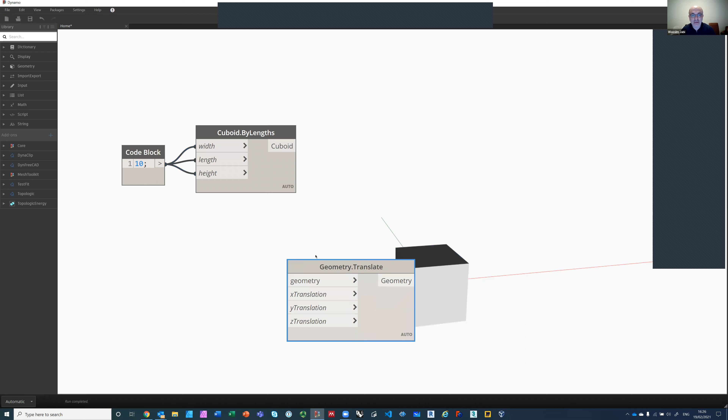What I want to do is a 3 by 3 composition, so I'm going to make 3 cubes and 3 cubes in a grid. That's how we do it in Dynamo. I'm going to translate these - if you know a better way to do it, please don't shout at me, I just do sometimes a very naive way of doing things. But it really doesn't matter. So I'm going from 0 to 30 in the Y, and I'm going to make a cross-lacing so they look like a grid.

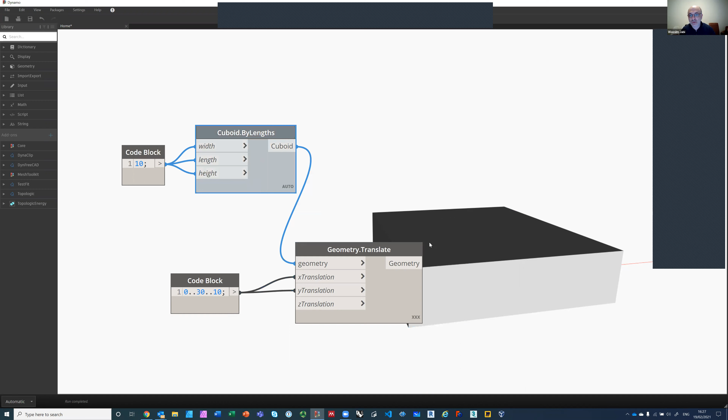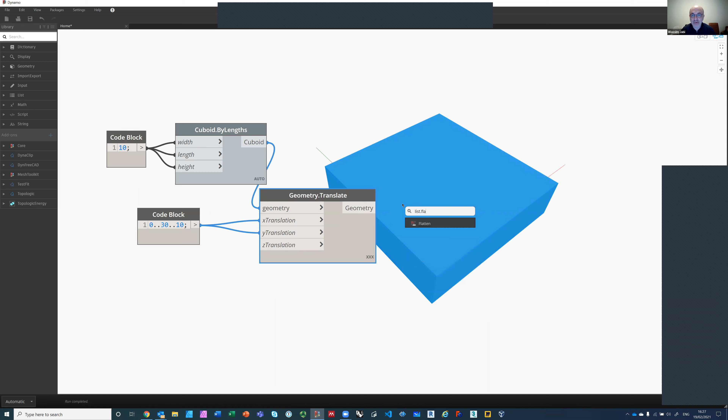Now it might look like a solid, but in fact this is made out of several cubes, a 3 by 3 grid. As I said, it's not important how we got there, but this is basically what we're doing. I just need to get the windows out of here, just to get a good view of it. And I'm going to flatten this list - just make a list, and I'll show you what this list looks like. So it should have 9. Oh, why does it have 16?

Sorry, I'm going from 0 to 30, I should go from 0 to 20. It should have 9 cubes, 9 cuboids - that's what it is. So now that I have these 9 cuboids, I can change them into topologic cells.

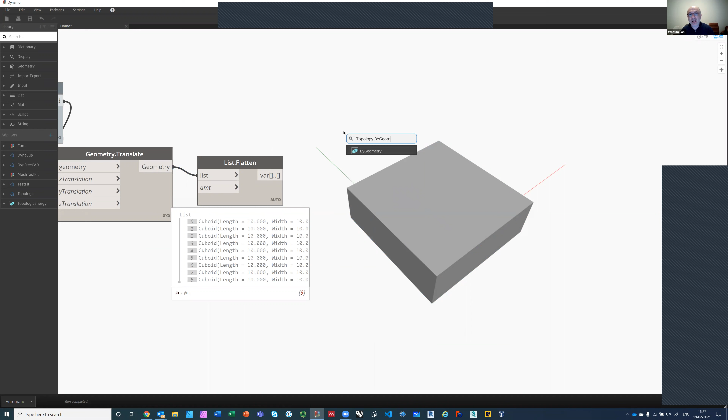So I can say topology by geometry. Now these are things that I have written, or rather the team has written, so this is all under topologic here. All of these things going from a vertex, an edge, a face, a cell complex, etc. But topologic has only one entry point and one exit point: topology by geometry, meaning create a topology from a geometry, and topology dot geometry without the word 'by', which means take a topology and translate it back into geometry so I can see it on the screen.

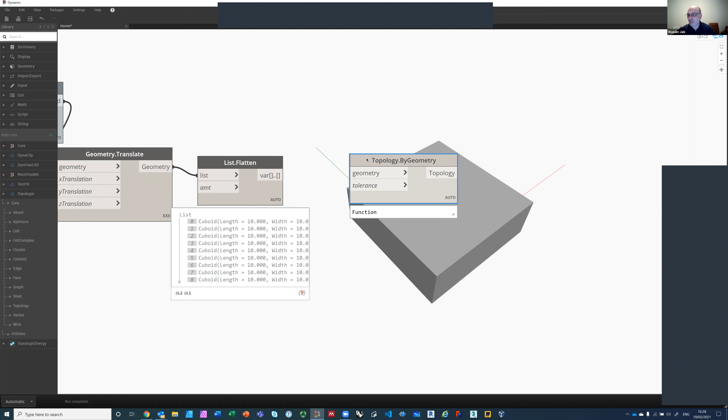By design, this is a user interface decision - we decided that topologic should not draw anything to the screen until you ask it to, just to save you time. Because you are thinking systematically about topological relationships, most of the work you're doing is about that, not about the form, as Miguel has said. So we decided not to draw anything to the screen automatically. If you want to see the geometry, you can do that, but mostly you are looking at the relationships.

So once I have connected this geometry to topologic, I get 9 cells - a cell is like a container of space. Once I do that, I usually go ahead and hide the original cubes, because right now I am in my topologic world here.

So let's start simple. Let's say I want to build a connection - right now these are 9 independent cells, they don't know about each other. In order for them to know about each other, you need to build a higher structure called a cell complex. The word just means a group of cells that are interconnected. So I'm going to do a cell complex by cells - the word 'by' is always an agreement on how we do it. So, cell complex by cells.

So now I have a cell complex. You don't see it yet. This cell complex is a 3 by 3 grid. But let's assume I'm a structures guy, and I want to order the beams and columns that make that cage. So let's go ahead and get the edges of this. So, topology.edges.

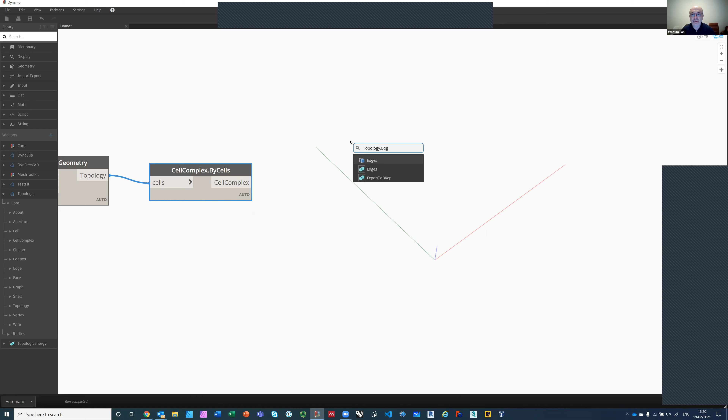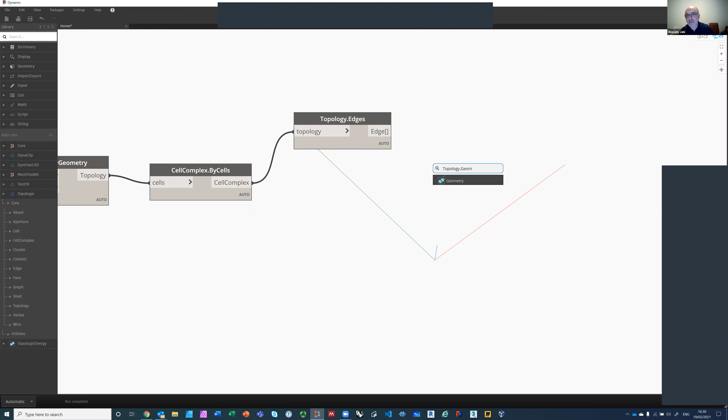Okay, let's go ahead and visualize them. So, topology.geometry. And these are the edges.

Now what is so special about that? You look at that and say, well, I could have just drawn it in wireframe before. So what is so special?

What is special about this is that there are no overlapping edges. So if you want to build this out of a wire of some sort, get rebar, get cables, do anything, and order these pieces that are 10 units long, you can count them. We can sit down and count them. Topologic will give you those unique items, never overlapping. So there are no overlapping faces, no overlapping edges, and no overlapping vertices. Everything is unique, and everything is interconnected.

So I can ask this vertex here to give me its edges, and it will give me those 3 edges. I can ask this edge to tell me which 2 faces it's part of, and it will give me this horizontal face and this vertical face. So everything is interconnected. If we count them, do you want to go through that exercise? I don't know if you want to go through the exercise of counting the unique stuff, but you'll end up with exactly 64 edges.

Could I ask something about this? Yes, please. What if somehow I made it in a different way and one of my cells is like 0.00001 centimeter off? What would happen then?

If it is off within a tolerance, everything works because we're using floating points. It has a 0.0001 tolerance. But if it is off, and we get that a lot from dirty BIM models as we call them, it will not build it if it cannot build it. Within that, if it violates the tolerance, it will not build it, definitely. It will say, I cannot build a cell.

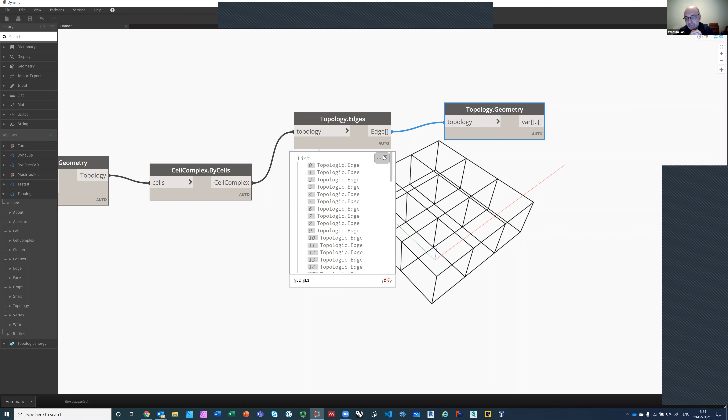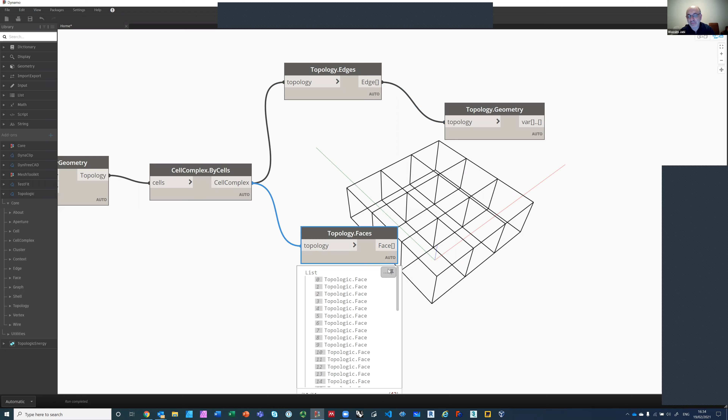So you see them here on the left side. Okay, so we got the edges, perfect. So let's go ahead and get the faces. So topology.faces, and again you can count them, and we can find out how many faces. But we have 42 little squares.

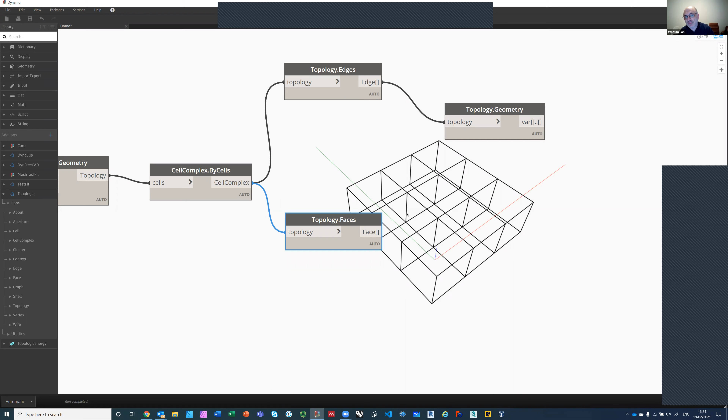Now let's find out, let's do a simple operation. We need to find out the interior faces of this cell complex, right? So the interior faces are these interior walls, and we want to separate them from the exterior walls. So what is the rule for finding out? What distinguishes an interior wall from an exterior wall in this type of construction? What can I use to test it?

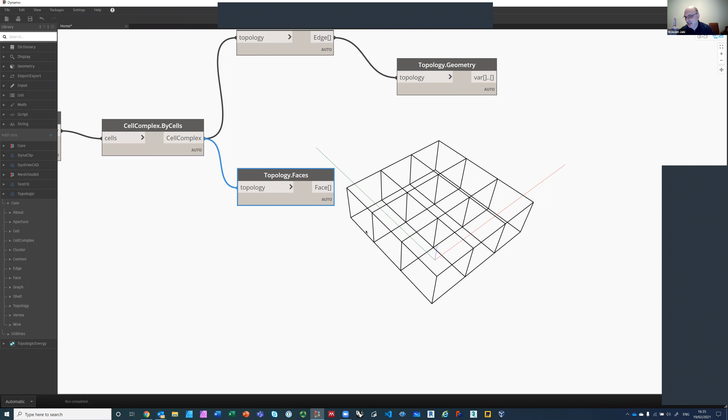They're connected to 2 cells. Exactly. So the interiors are always connected to 2 cells. The exteriors are always connected to 1 cell. So I can test for that. I can say topology.cells. And now we are climbing up the tree rather than climbing down the tree. I'm not taking a cell complex and saying give me the cells, or taking a cell and saying give me the faces. I'm taking a face and saying give me the cells that you are connected to.

So it's a more advanced operation. I get this nested list. You'll notice that because I have a list of 42 faces, I will have a list of 42 of these things, from 0 to 41. But some of them have only 1 element, 1 cell, and some have 2 elements. For example, face index number 1 has 2 elements, 2 cells. So obviously that's an interior one, and I need to extract it.

So I can do a count, I can count these things. So I can do something like list.count, and I'm going to count this list. Now if I count the list, it will tell me you have 42 things. But I don't want to count the top list, I want to count what's inside the list. So Dynamo allows me to do that. If you click here, you say use levels, and I want to count at level 2, like the list within the list.

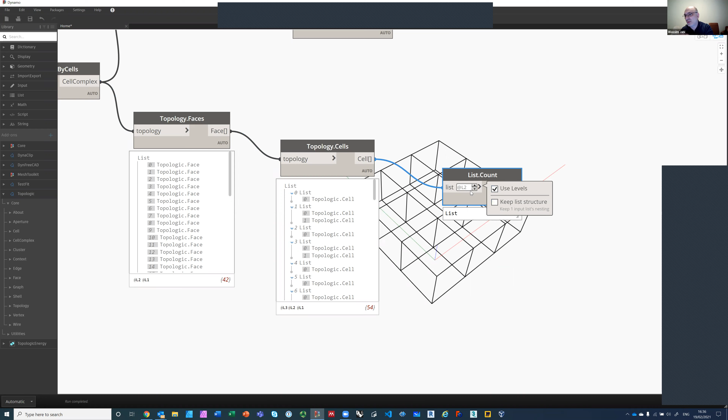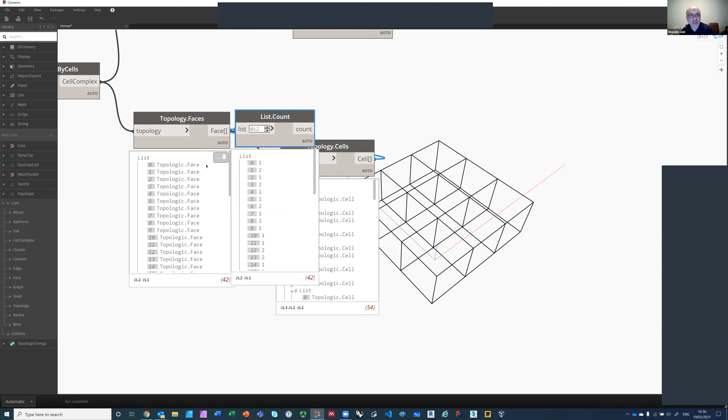So now I get a list of 1s and 2s, and I can put it next to this one like this, and match it. This one is an exterior, oops sorry, this one is an interior, exterior, interior, etc., as a concept, because this one has 1 cell, this has 2 cells. So now I can turn this into true and false, I can do an equality test.

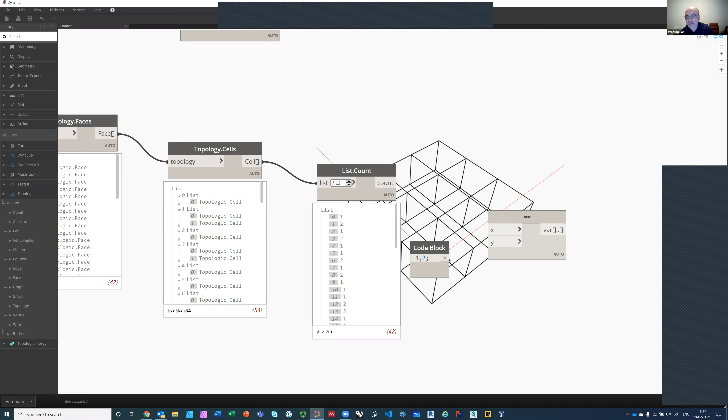So I can say, okay, let's find out if this is equal to the number 2. So tell me which ones are equal to 2. So now I have 42 false or true values. So I can use this to filter this list of faces. If it is false, don't include it. If it is true, do include it.

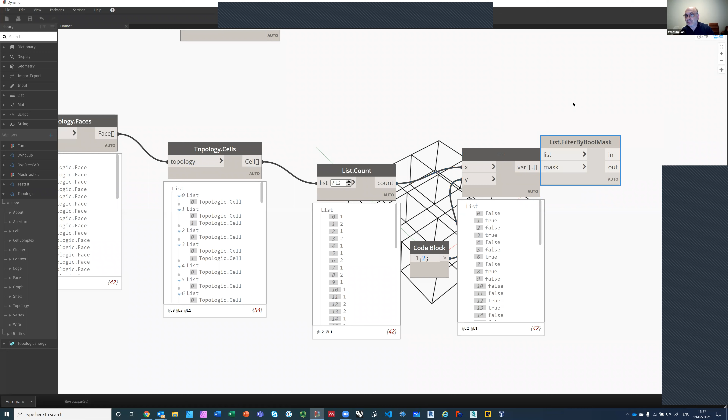So I can do something like filter by Boolean mask. And this is not Topologic, this is all Dynamo now. But as I said, what's important is not that I'm able to filter, what's important is that the face was able to answer the question for me: are you bordering 1 cell or 2 cells? That's what's really essential about this.

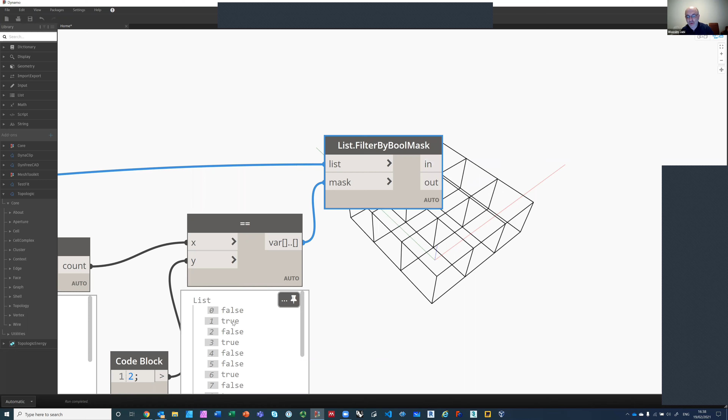So I'll feed it the list of faces, and I get an in-list and an out-list. The ones that satisfy this condition of true, and the ones in the out do not. So I can take the ones that are in and visualize them. So I can say topology.geometry, and visualize those. So those are the inner ones.

Any questions on that? Did I lose people or are we okay still?

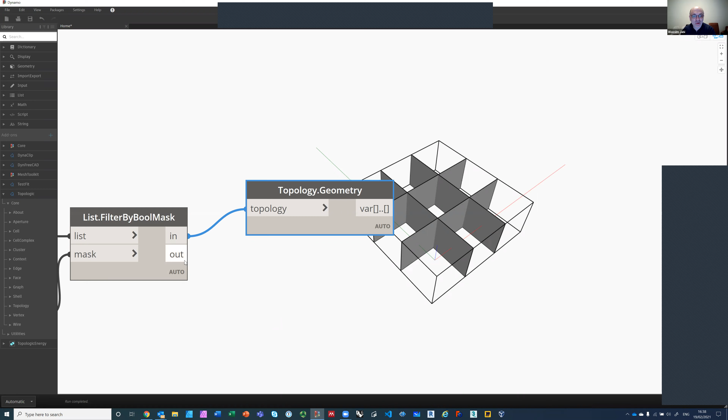And the out ones are the ones on the outside, including the top and the bottom, obviously. These are the exterior ones. And I can apply these things to everything else.

But let's get to something a little bit more advanced, and I think Miguel would enjoy this one. So we're going to apply a space program to this. I'm going to put a living room, a bedroom, a kitchen, a dining room in all of these things. Now obviously this is not a real design or not even a good design, but let's just pretend.

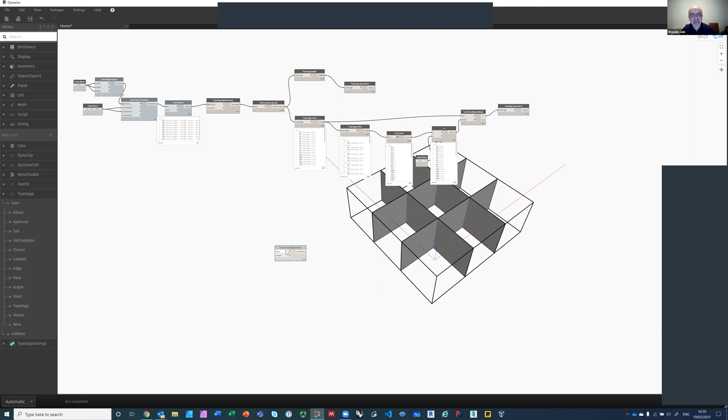So I'm going to do a dictionary by keys and values. What is that? Basically a dictionary is nothing more than 2 coordinated lists. In the first column you have the key, like you can call it name, first name, last name, salary, employee ID, whatever it is. The second column is the actual value, like John, Smith, gender, all of that. So I will create this key and value, I can call them anything I want. I'm going to invent name as a key and maybe something called living room, just living, as a value.

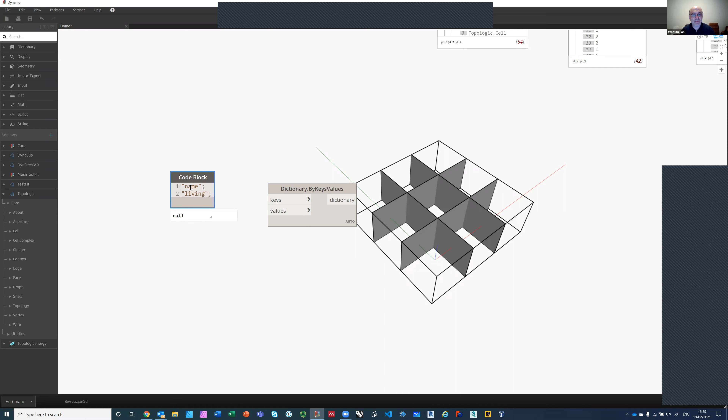So I get a dictionary that has this key called name, and the value of that key is called living room. Simple enough. So I'm going to do it the naive way - I'm just going to copy this a few more times.

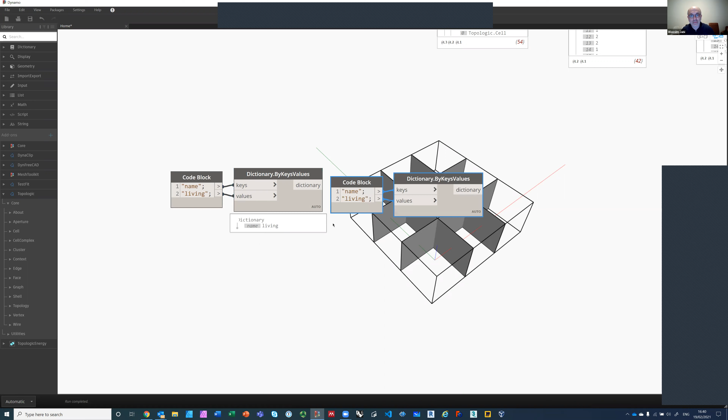Let's do a few things here. Sorry, I'm going to be a little bit inefficient about this. I'll arrange them a little bit now and put them all in a list. I'm a bit messy here.

So let's call this dining, let's call this kitchen, let's call this bedroom, let's call that bathroom. Let's do one more - let's call it lobby, for example. Organized a little bit - we're architects after all. That's okay, I could arrange them if I wanted to.

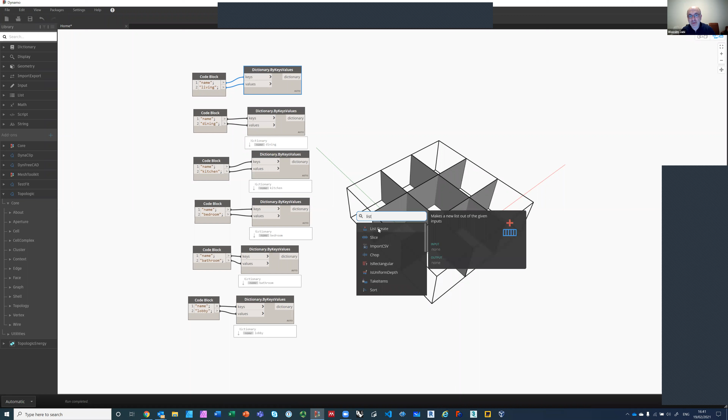Are you with me so far? I just made dictionaries and gave them different space types. So I'm going to make one big list out of this, but this list should be the list of rooms that I have. Now I have 1, 2, 3, 4, 5, 6 space types, but I have 9 spaces. So some of them will be doubled up - obviously I might have 2 bathrooms or 2 bedrooms. So I will do that.

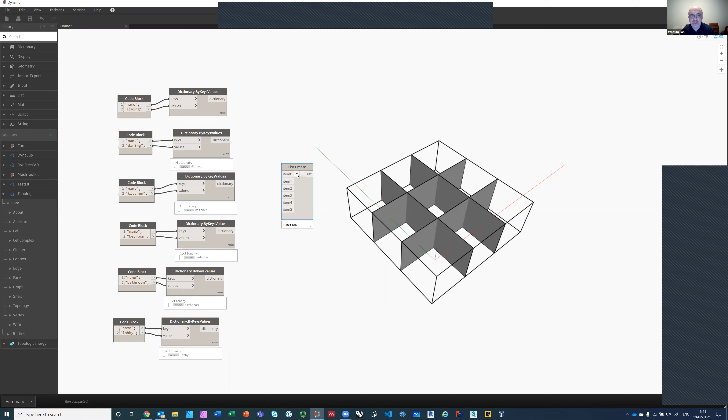So I'm going to create 9 items, from 0 to 8. And I will start, say, one living room here, one dining room, one kitchen, maybe 2 bedrooms - so I'll connect this to 2 items - maybe 2 bathrooms, 1 lobby, and let's give the living room 2 spaces. Let's make it like some kind of TV room and living room or whatever it is. So we have now a list of 9 dictionaries.

Now the order is, I don't know what order I have done. So obviously if you are designing it, you would do it in a proper order and you assign it correctly.

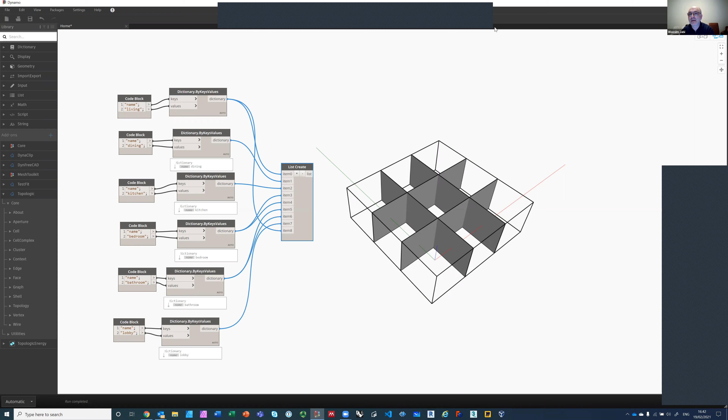So I have a chat, so I'm gonna try to read it. Sir, must attend a call from my boss, try to - yeah, no worries. And okay, so we have those.

So now I would like to assign those dictionaries to the cells of that cell complex, and Topologic allows you to do that. I need to take those dictionaries and put them inside. So how do I do that? I need to find a point in space that is unique to the cell in order to tell it at that location, please put that dictionary. Okay, so how do we do this?

A unique point in this construction that I have here is obviously the centroid. The centroid of every cell is unique to that cell. Otherwise, we have something called point inside - so you can get a point that is guaranteed to be inside that cell.

So we have the cell complex. Let's get the cells of the cell complex - topology.cells. And this is the cell, sorry, no, this is the cell complex. So it should give us 9 cells, right? Those are the 9 cells of the cell complex, and those are interconnected.

Let's get the centroid of those cells. So now we have 9 vertices. Those are unique - if I visualize them, let me go ahead and visualize them for you. Topology.geometry. Those would be the 9 centroids of the cells, if you see those little points there.

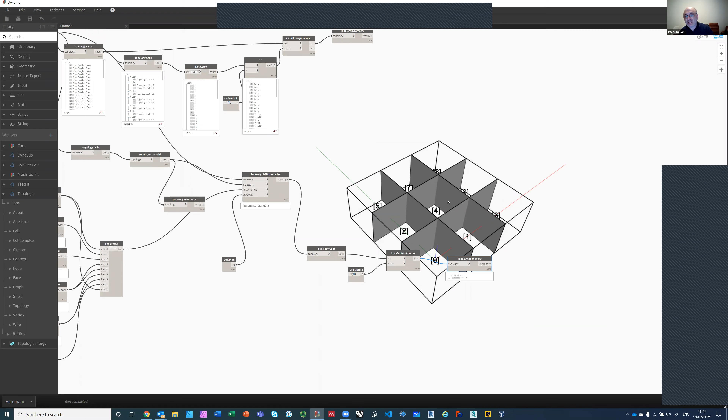So these have now been embedded. For example, let's take another one. Let's take number 4. So number 4, I can look at it here. Item number 4 comes in and it's a bedroom. Number 4. So let's go ahead and type in 4 here. And it's a bedroom.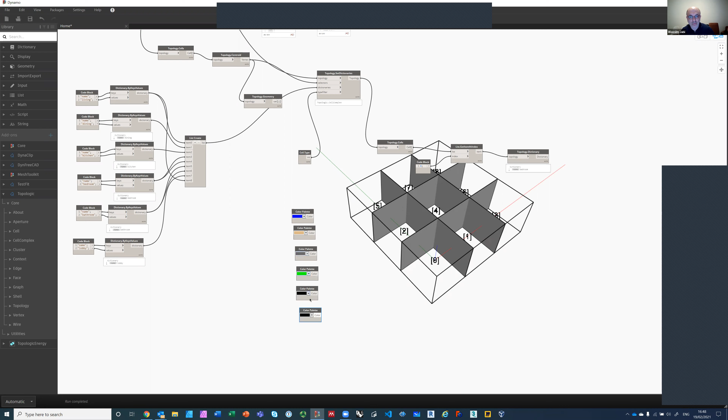Make sense? So I can color code these now based on their room types. For example, I can say, let me create 1, 2, 3, 4, 5, 6. Let me go ahead and create 6 colors. Six.

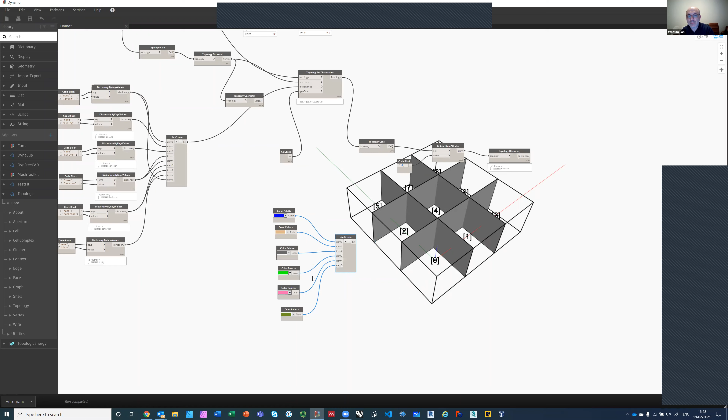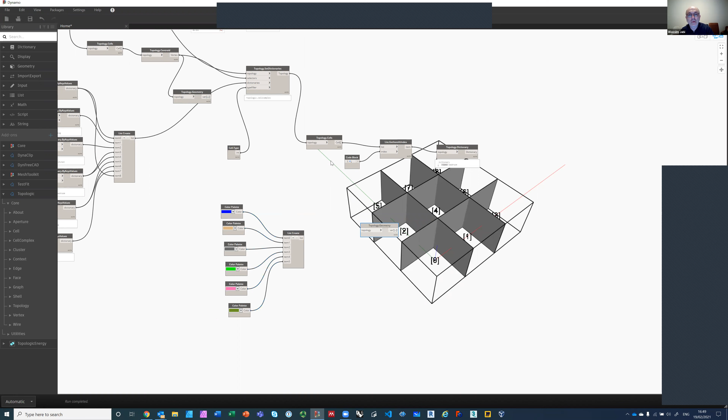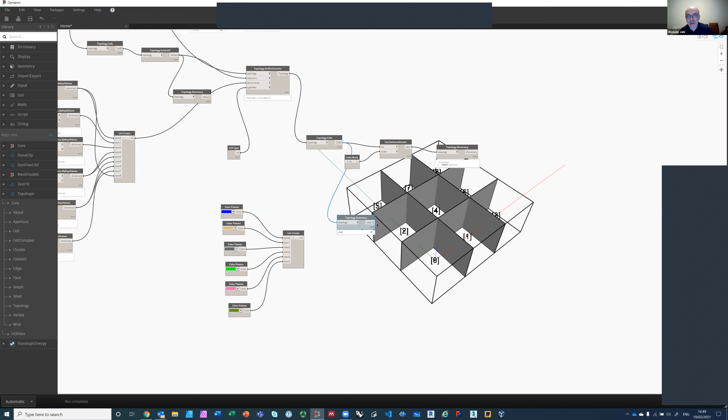All right. And then I can say topology.geometry from those cells and hide that. Okay. Now I will do it with a bit of a Python script. And this will be the last thing.

I won't keep you any longer than this because this gets to be a bit much. But basically, what I'm going to say is I'm going to feed it the cells. So let's go ahead, cells is equal to in0, right? And then, let me see, because I have it here from my cheat sheet. I can say that I can do an index equals. So the living room is 0. Let's say the kitchen is 1. Bedroom... Bedroom is 3, etc., etc., etc. I'm not gonna, you know what? I'm not gonna waste your time with this. It's gonna take a while to write this up.

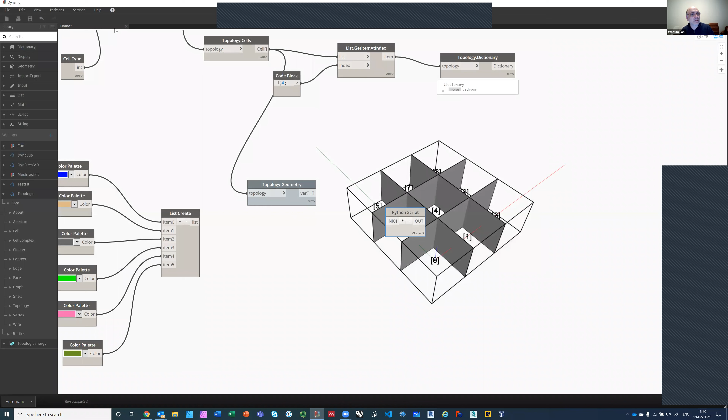I think it's getting late in the day. Let me not do that, and just let me open a new one, the one that I had before. So I will not save that, and let me just open the one that I had before. Just show you the end result of it. Because the details really don't matter, and I can share that definition with you.

No worries, Ryan, thanks. But you see it here. This is the same thing as we have before, where you're able to color code them based on what they are, but also you can derive the walls that are between certain spaces.

So in this definition, I'm saying I want the walls that are between the 2 bedrooms. That gives you walls that are between 2 bedrooms, or between a bedroom and a bathroom, as it says here. So if I want to see the walls between the living room and the kitchen, there are no walls between the living room and the kitchen. Okay, so we'll do between the living room and the lobby. No, there's nothing between the living room and the lobby. Hold on. Let's try living room and dining.

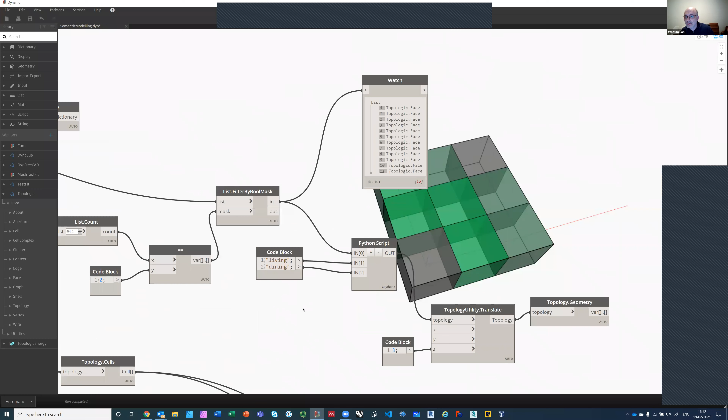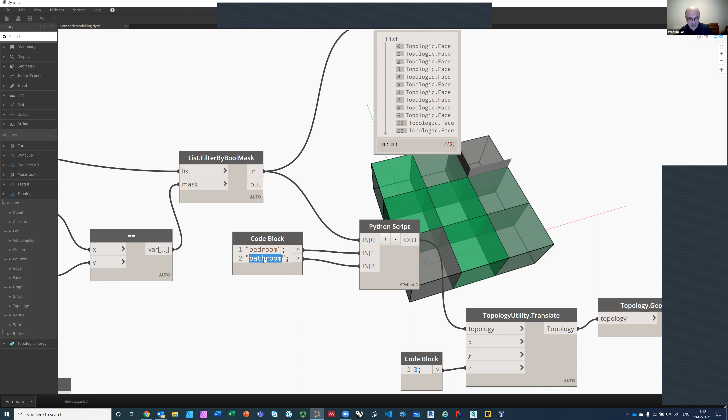What is going on here? Doesn't seem to be wanting to work very well. Let me try again. Bedroom, bedroom. I think I broke it. It was working, but I don't know why. Okay, bathroom and bedrooms worked. Maybe bedroom and lobby. It doesn't want to work on the other ones. I don't know why. Not sure. I must have messed with it and it didn't work.

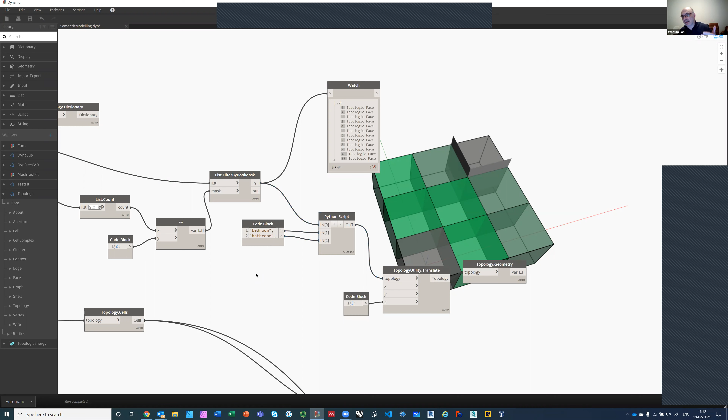But the idea is that it can give you the walls that separate cells that have a certain dictionary. That's the whole idea. I know it does work, but somehow I must have messed with it. And it's color coding them based on the space type.

So you can change, for example, if I make the living room not there, so if I assign it to a different item, you'll see the light green - there are now 1, 2, 3, 4, 5 light green cells that are all living rooms. These are the ones right here. And if I assign more kitchens, for example, you'll notice that the kitchen starts taking over.

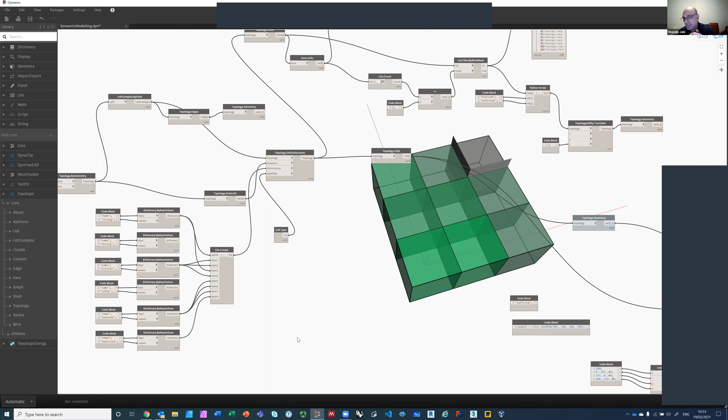When you see Miguel on the website talking about informational modeling, the geometry really doesn't matter. It could be any kind of geometry. What he is manipulating, what I'm manipulating, is basically the information - what is the meaning of these spaces? Are they kitchens? Are they living rooms? Are they public? Are they private? And all of that.

But I'm going to stop here and maybe take a few final questions before I let you go. May I?

So Topologic is an engine which behind it has a kind of database storing the dictionaries, storing the edges, connections, and also the asking mechanism for those informations. So is it a database or a graph base, or what is behind, and is this topological?

That would be what we could use for FreeCAD or Blender or whatever else. Correct. It is both the database connectivity, but also it is a geometric engine, a very capable Boolean operations, geometric B-reps, all that. Anything that FreeCAD can do, because FreeCAD is based on the same engine called Open Cascade or OCCT. So Topologic is not just a database management system, it's really not that. It is coupled with the geometry - it's a 3D CAD kernel, as they call it. But we layered on top of it the ability to handle dictionaries, embed dictionaries in geometries, extract them, and manipulate them.

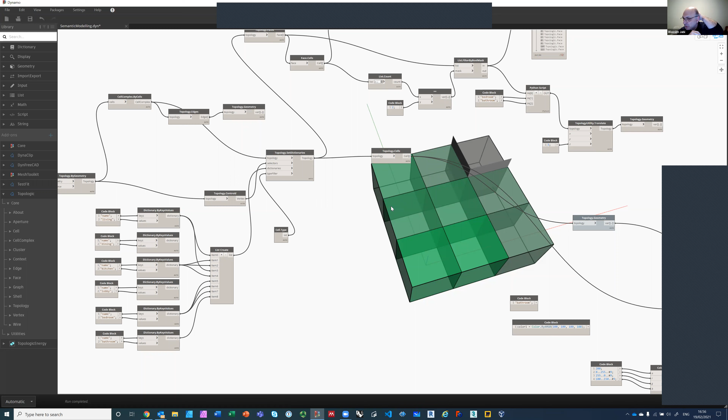Can I have holes in faces? Yes, Topologic. And when I have two faces which don't share any vertices, do they still get recognized as one face? Yes, if they share part of the face. I mean, you can have holes - it's a boundary representation, so anything you can model will be represented as best as it could.

So you can have shells, you can have shells with holes. But not only that, we have the idea of aperture. So if you want to do a door or a window inside those faces, you can do that by overlaying another face on top of it. So faces, or any topology, can have contents - can have other things in it, other faces or other cells in it.

Detached, not connected. So if I have, for example, two cubes that are touching with one face, but the vertices don't match, will it still recognize the faces as touching, even though the vertices are not in the same place? Correct. Yes, absolutely.

And then I have one more question. You said that you're working on Sverchok in Linux, but it's all Python, right? So it means it should work immediately in Sverchok for Windows or not? No, unfortunately not yet. We're working very hard on that. We're having technical issues with that. So in order to bring the C++ - Topologic is written in C++ - to Python, that's what we did, we brought it to Python.

It was much easier to bring it to Python on Linux using something called CPPYY. It's another piece of software that translates C++ into Python. It does exist for Windows, but we're having a lot of technical hurdles making it available for Python for Windows. So Python for Linux is straightforward, and we have it - you can download it from GitHub, we have it available, and you can run it on Linux.